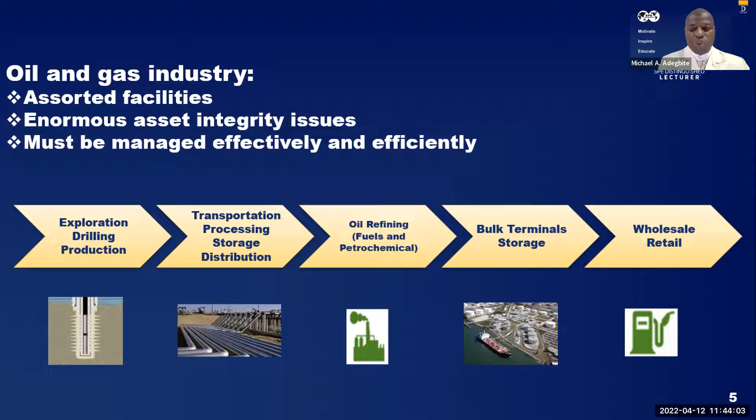Facilities are very, very key. A lot of facilities are being used, very assorted materials, from concrete to metals to plastics to glass and other materials. So facilities are very important, and a key aspect is the metal, which would be our focus. All these assets must be managed effectively and efficiently so that production of our hydrocarbons is not only economic, but also safe and very cost effective.

So the outline of this presentation will be the occurrence. We'll take a look at the occurrence. What is preferential weld corrosion? What is it all about? Is it a big issue? What are the challenges, especially in the oil industry? How do we come about this preferential weld corrosion?

That will take us to looking at the basic chemistry, or basic electrochemistry, or basic corrosion that most of us are familiar with, especially once you're science. And even those that are arts or non-science oriented, corrosion is a natural phenomenon. We'll be seeing this as we go on, and we'll be considering whether there's something beneficial at all from corrosion too.

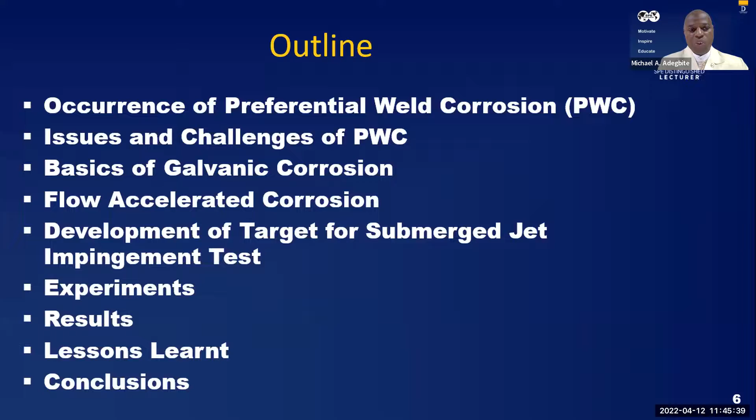And then we'll be looking at corrosion associated with flow. Anytime we have movement of a continuum, is there any corrosion that could be associated, and what are the likely issues and challenges. Then the development of submerged jet impingement, issues around that, how this target is developed and then deployed and assessed. We look at some lessons learned, and then run with some conclusions so as to implement in managing our facilities better.

Well, corrosion, again, is a natural phenomenon, and simply put, is a reaction or interaction between a material and its environment. Material now, it could be textile, it could be glass, it could be concrete, it could be metal, it could be plastic, composites, and other forms of materials. So when we have an interaction, basically electrochemical reaction, that's what we refer to as corrosion.

In this corrosion process, what simply happens is that a material will want to go back to its natural form. Simply put again, dust thou art, and dust shall thou return. And what are the possible consequences of this natural phenomenon? Material properties are degraded, especially desirable properties, could lead to premature failure, excessive maintenance, repair, and replacement, and long-term production loss, especially when it is not well managed.

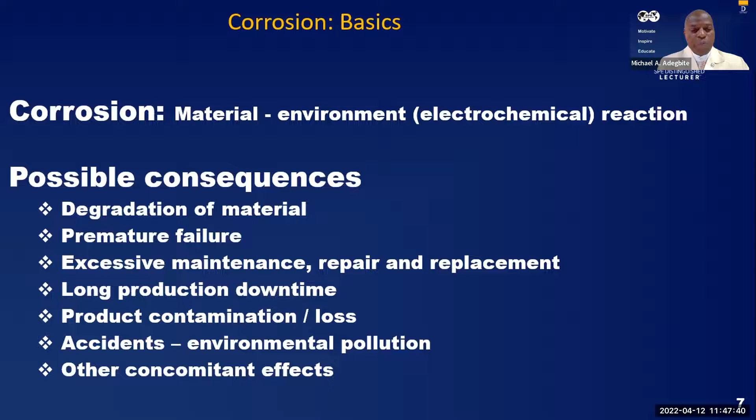There could be product contamination. We can have ingress of the environment into our product, and that contaminates the container or our product. We can also have product loss, and accidents could result from this. Product loss, again, could result in environmental pollution, both soil, water, and air, and other concomitant effects, such as secondary effects like fire and loss of life. And of course, the whole infrastructure being lost, and that will impact on production and all the production economies.

It's not all negative about corrosion. There are some good things about corrosion, and three basic major things that are very positive that we take advantage of: electrolysis. In everyday language, we're talking of coating of a metal with another metal. We take advantage of corrosion to do this, and with that, we can protect a material that can easily interact electrochemically with environment. Some products, even domestic products, roofing sheets - we talk of zinc-coated or anodized aluminum roofing sheets. This, again, takes advantage of electrolysis.

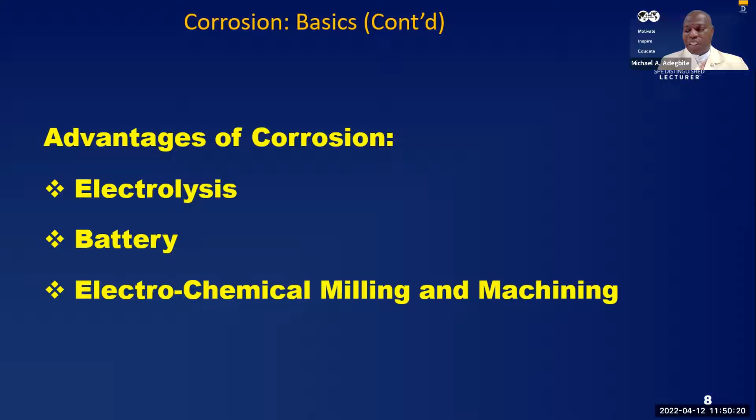Also, in terms of technology, machining - we are familiar with mechanical machining that involves mechanical removal of material from the surface in order to shape a metal. We cannot shape high precision components using the conventional, or even the high precision CNC machines, so we lean on electrochemical machining and milling equipment in order to machine systems with high precision, with tolerance limits very, very low. So we take advantage of the corrosion phenomenon to produce this.

Anytime two metals or two pieces of metal are welded together, making use of fusion weld - that is, whenever we fuse them together, we bring them to liquid state and allow the liquid metal to mix together, and then on withdrawal of the heat source, this liquid metal being mixed together now cools down and solidifies. There are some things that attend to that process whenever we join. Minimally, we have three distinct areas whenever we weld, and they are very, very important.

We can see the region of weld metal, and then an adjoining region referred to as the heat affected zone, and then the parent metal. The parent metal is far away from the excessive heat experienced during the welding operation. When it solidifies, the parent metal retains its structure, its phase phenomenon, morphology, whereas the heat affected zone has the same composition as the parent metal, but because of the intensity of heat experienced, there is crystallization and phase changes depending on the nature of the component. These phase changes compared with the parent metal are also associated with energy level differences. And of course, the high distortion associated with the weld metal, that is the metal that solidified, we can also see its highly distorted nature.

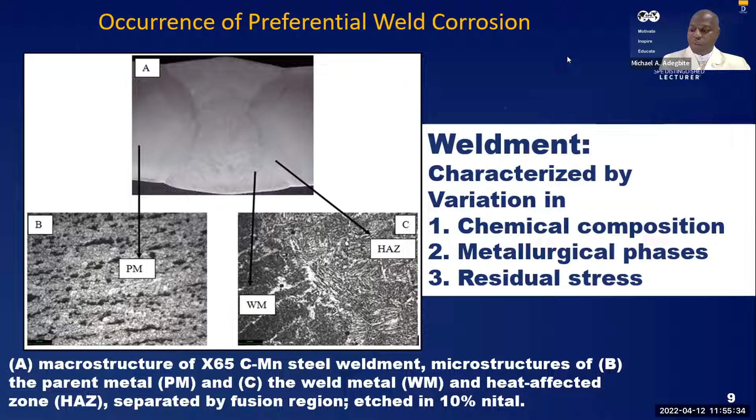So we can see here typical morphology being shown. Let's move on to the next slide.

Okay, so the next slide, we are looking at a typical post-weld corrosion incident. When we say preferential weld corrosion, we are considering selective attack of the weld metal or selective attack of the heat affected zone, or perhaps both, corroding rather than the parent metal or base metal. The base metal, when joining, is more noble and will not corrode as fast as the weld metal or the heat affected zone, or the two of them combined. That's what we refer to as preferential weld corrosion.

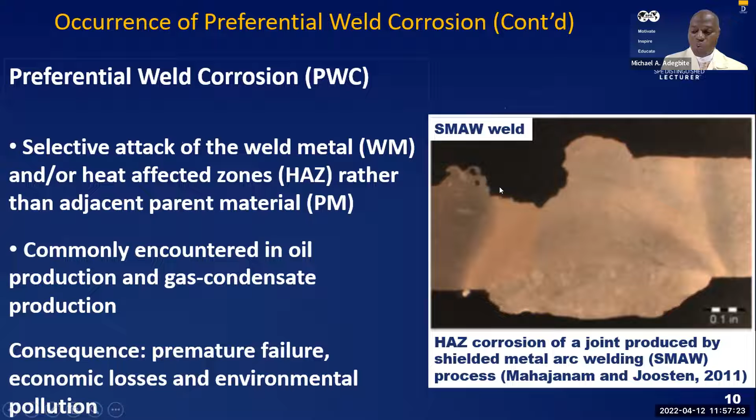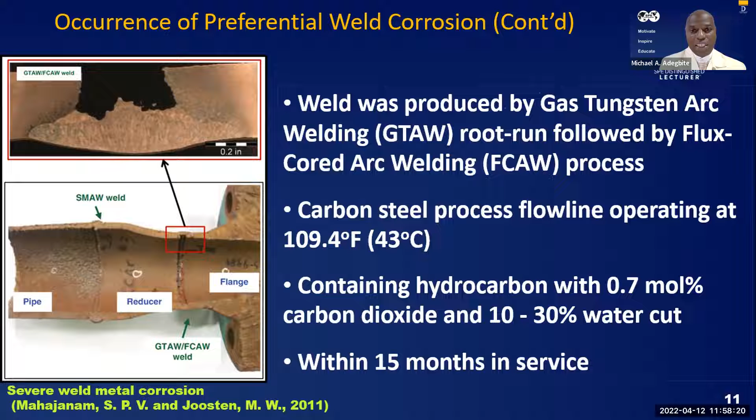It's commonly encountered in oil facilities, and the consequence is premature failure, economic losses, downtime in production, and environmental pollution. In a typical example here, we can see the weld metal selectively corroding compared with the heat affected zone and the parent metal. This happened within 15 months of being in service, leading to a failure around the reducer and then a shutdown. So a facility expected to serve for 20, 25, 30 years failing in less than 2 years is not acceptable. What could be responsible? Can we mitigate it? Can we reduce it? Can we avoid it? Perhaps much more important, can we predict it?

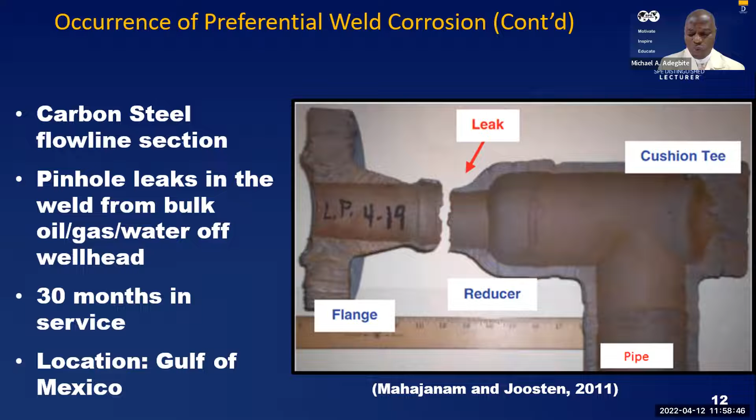Another typical example is a carbon steel flow line section having pinhole leaks. This happened 30 months in service, that's 2.5 years, in the Gulf of Mexico. And this is typical of what happens around the globe. So we need to roll up sleeves and be able to predict, to see this, and then be able to mitigate if we cannot prevent.

So what are the major factors that can influence preferential weld corrosion? Electrochemical characteristics of the weldment, that's the vicinity. What is the electrochemical nature of the vicinity of the weld? We can see that typically composition, phases, and energy associated with each region varies.

So there is variation in energy associated with each region across our weld, and that's very important. We need to be mindful of the fluid or environment, the flow pattern, especially in pipelines, be it gas or liquid. Even some may be combined with solid particles, where we can also have erosion. So all this, we have to roll up our sleeves and take a closer look.

How about inhibitors? Yes, before now, inhibitors were being deployed, but it's also noticed that they are ineffective in some instances, especially where we have flow. Another typical measure being taken in managing corrosion is corrosion allowance, which typically makes room for corrosion over a period of time. Unfortunately, as we have seen in this particular case, this is localized corrosion. General corrosion is what corrosion allowance is concerned about. Whenever we make use of corrosion allowance, the assumption is that the corrosion prevailing is general or uniform. Unfortunately, preferential corrosion is not uniform.

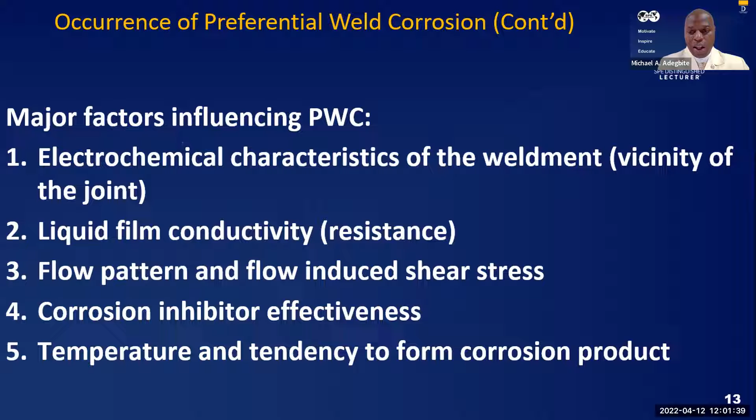Temperature of our system is also very important, and that of the corrosion product too. So these again are typical examples.

And what are some of the challenges? Again, the mechanism is a challenge. How does preferential weld corrosion occur? We need to know the location of attack. Can we determine which location, whether it's the weld metal or the heat affected zone, that will be attacked? Or can we predict, or perhaps even prefer, that it should be the parent metal? How about the efficiency of the chemical inhibitors being deployed? It's common knowledge now that inhibitors are inconsistent and not effective in some instances, especially where there is flow.

And what are some of the susceptible conditions that could lead to this challenge? How exactly can we evaluate, in a flowing or dynamic system, the shear stress on the wall of our containment, or the wall of our pipe, or storage tank? How can we assess the shear stress so that we can know the rate, or the conditions, that could lead to removal of protective layers? Then we'll be able to mitigate this preferential weld corrosion.

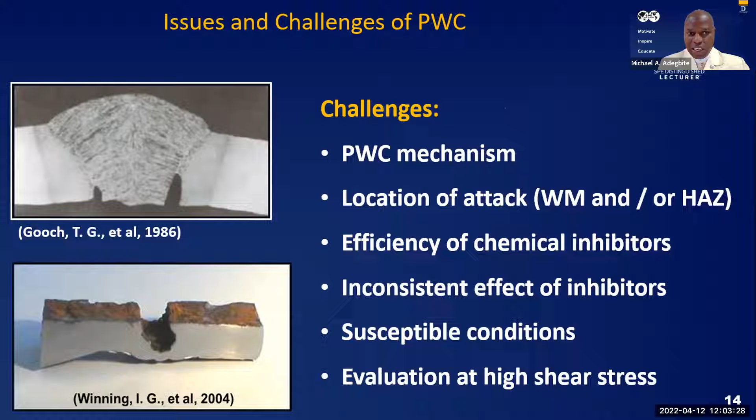It's a big challenge, but there's no challenge without a solution. And that essentially is what this discourse is all about.

It's common knowledge that whenever we have two different metals, we have what is referred to as galvanic corrosion. When two different metals are joined together, present in the same electrolyte, in the same system, and electrically connected, that's the condition for galvanic corrosion to occur. And exactly what do we have whenever metal is welded? Is it typical, or do we have these conditions satisfied whenever we weld? Well, we'll be able to answer as we go on.

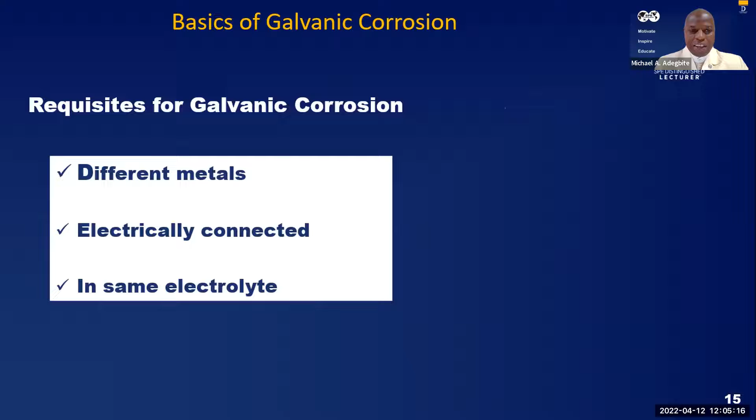Let's look at some of these conditions again. The three conditions: at least two different materials will be present in the same electrolyte, should be joined together, and also be in the same electrolyte. Of these three systems that we have here, which will you say that galvanic corrosion will occur in? Which meets the three conditions of different metals being electrically connected and in the same electrolyte?

Which of these three? I wish we can have a response, please. You may wish to unmute and share with us, choose 1, 2, or 3, please. Will it be the first, the second, or the third? Can they drop the comments in the chat box? Oh great, I've seen two people say 3.

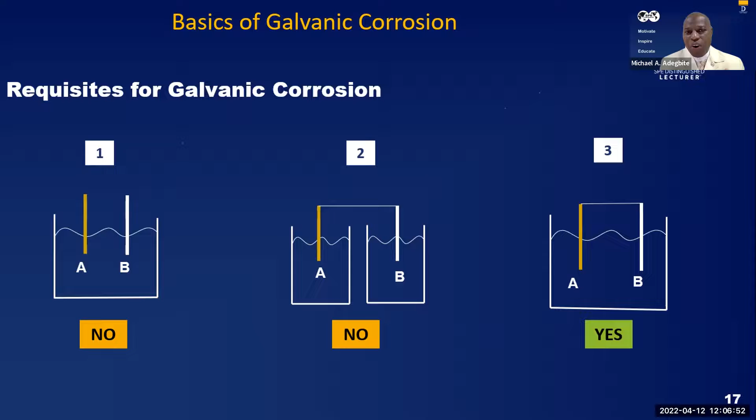3, oh fine, that's 100%. Thank you very much, in the third system, very well. The third system meets the requisites: two different metals electrically connected in the same electrolyte. And you will agree with me that that is exactly what we have whenever we weld. The metals being joined together are electrically connected in the same electrolyte, and of course being different. The three regions we have seen in a typical weld are different, and the energy they possess also differs. That difference is enough to trigger what we refer to as corrosion, because there will always be flow of thermal energy from the region of high temperature to the region of low temperature.

The same thing in a conducive environment, there will be a flow of energy from one region to another. And that's essentially what happens when corrosion occurs. Metals having higher potentials will tend to now assume a lower potential, that's losing some of the energy and assuming a more comfortable low energy state. That's essentially what happens whenever corrosion occurs.

So a more active metal, that's the anode, reaches higher potential and corrodes faster. And the more noble one is the cathode, and corrodes slower or at a lesser rate, is being protected, galvanically protected by the anode. So the cathode enjoys a measure of protection, and that is what happens when we have preferential weld corrosion.

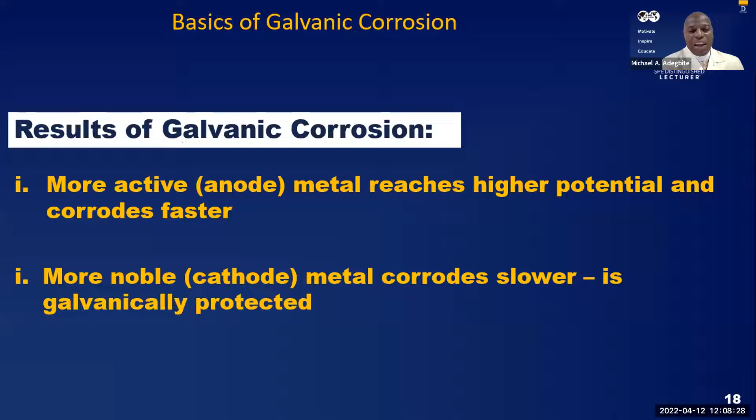So whenever we have preferential corrosion, it means that the parent metal is enjoying considerable protection while the weld metal and/or the heat affected zone goes into solution. And that's what we don't want to occur. So we want to reverse that trend. We want to deliberately make the parent metal be the anode, be the one that will have higher potential, or be the one that will go into solution.

You will agree with me again that because the cross-section area of the parent metal is more than that of the heat affected zone and the weld metal, then it's better for the parent metal to give more, because it will feel the pinch, the pain, so to say, lesser compared with the heat affected zone or the weld metal.

So in a flowing system, there are also some considerations. Whenever we have flow, there are consequences, and these are some of the things we'll be looking at. So there are some methods before now that have been deployed: the recirculating flow loops, the rotating cylinder, rotating cage, and the submerged jet impingement.

I just need to step forward a little because of our time.

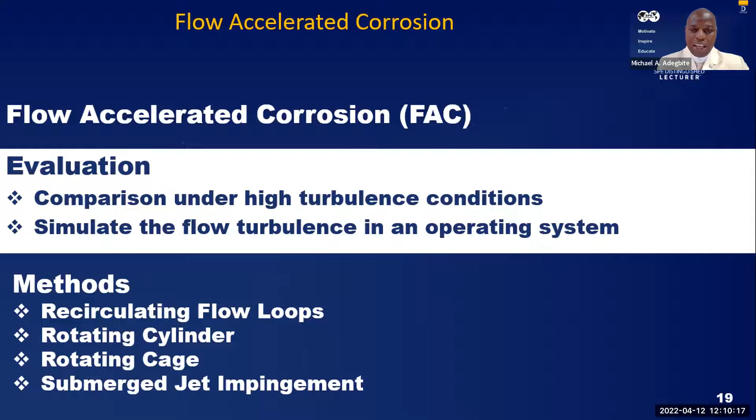So that's essentially what we'll be looking at. We want to use this to simulate the turbulence or the flow pattern in a typical pipeline. And the conventional methods, unfortunately, fall short of what the real typical field situation is like. The one very close to it is the submerged jet impingement, and that is what is being employed in this particular project.

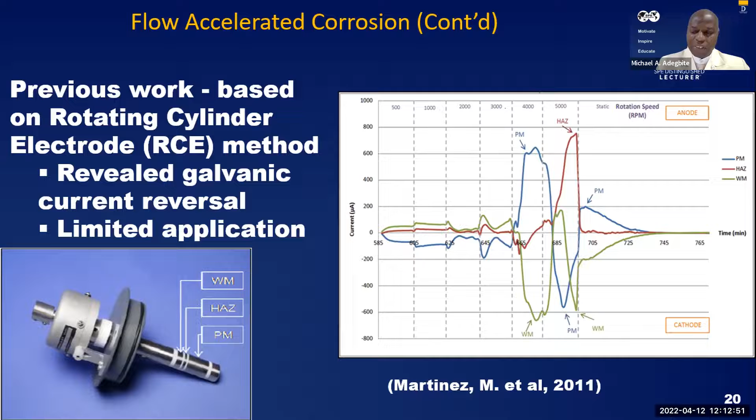So in order to really simulate field conditions, wherein we have a shear stress in excess of about 200 newtons per mm squared, what we have typically is less than about 70. That's what the previous tests have indicated. And then we need to get closer to what the flow conditions are like.

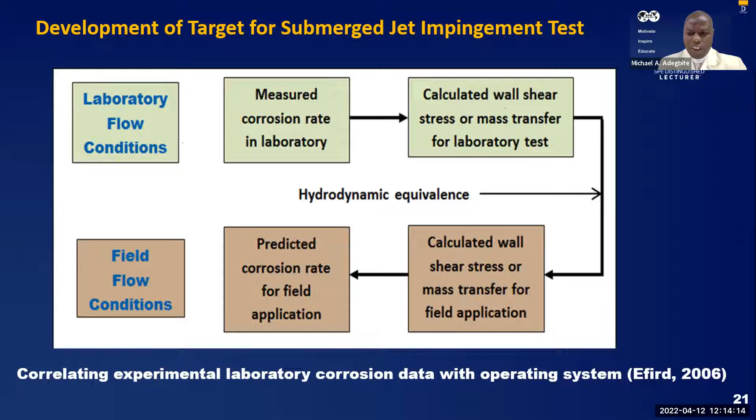And modeling is conventional knowledge, especially to colleagues who are mechanically inclined: modeling typical field situations in the laboratory, and then using an equivalent hydrodynamic factor to evaluate what could be a typical flow condition or shear stress in the field. This data is used conventionally, and the same is exploited to study typical flow regimes in the field simulated in the lab.

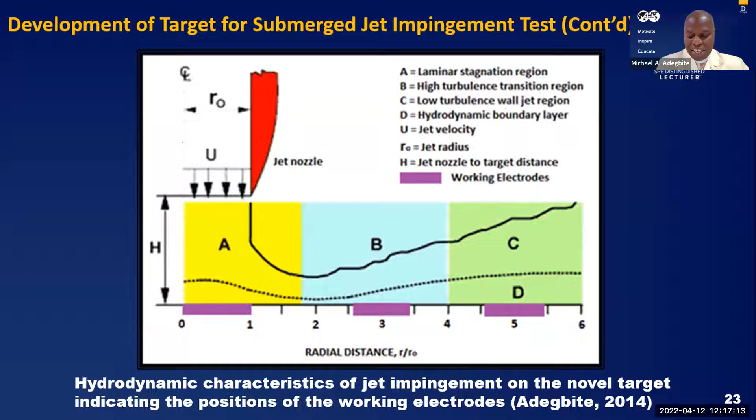And that shows that when we have flow, there are some regions associated with high turbulence and some regions, especially at the elbows, that will be stagnant. And then we also have regions with low shear stress. And that's typical, and this is used in this particular study. So the nozzle being put together, we have the nozzle, the jet, and then we have the targets being mounted in radial distances. We have the laminar stagnant region, the high turbulent transition region, and then the low turbulent region. These are characteristics of the hydrodynamic system under a flow regime.

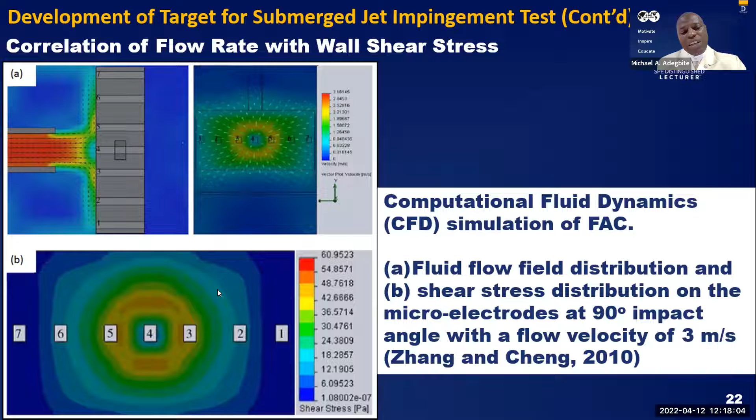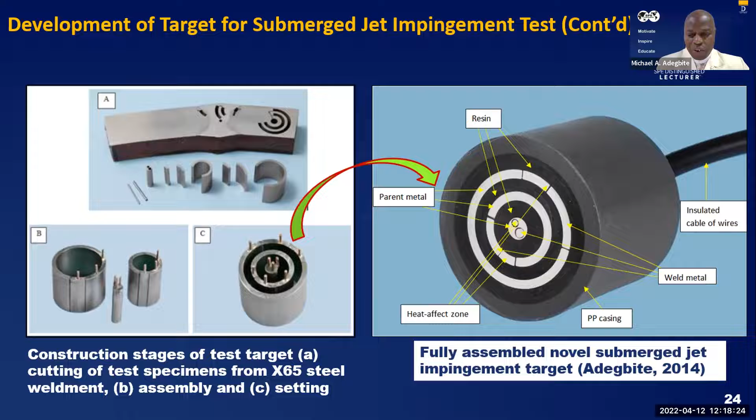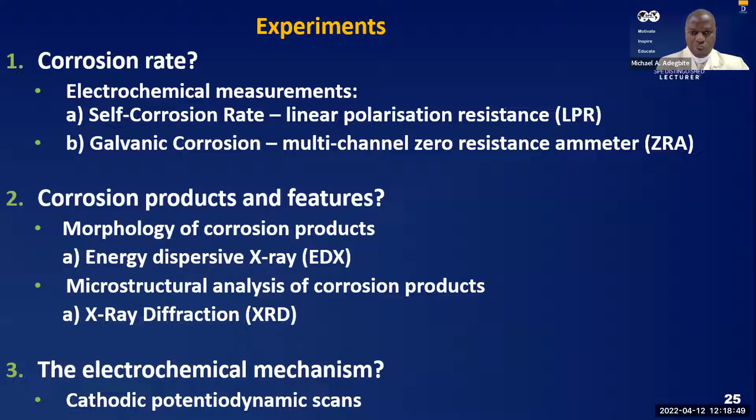The test looks at the corrosion rates, self-corrosion, galvanic, and then the corrosion product features, and what exactly could be the controlling factor. That's the third test, the scanning that was done. Let me quickly move faster now because of time.

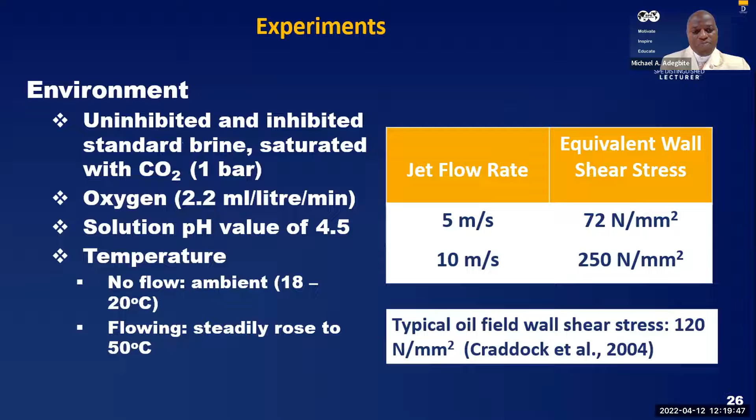So tests were conducted in a stagnant system, and in a flowing system with 5 meters per second, and that 5 meters per second is typical of a wall shear stress of about 72 newtons per mm squared. And a higher flow rate is associated with 250 newtons per mm squared. Whereas in a typical oil field condition, we have a wall shear stress of about 120. So this particular method affords us to even go beyond the typical field situation.

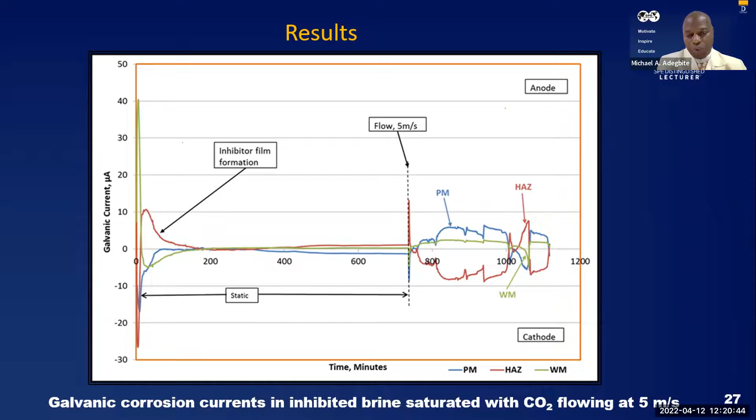So in the test being conducted, we can also see the reversal of the galvanic current here. It also establishes that the inhibitor is not consistent. This is with a typical chemical inhibitor, and we can see the current reversal. The current reversal shows that there is a buildup of a protective layer and then a breaking of the same. And at the time we have the breaking of the protective layer, the corrosion rate spikes. And of course, it shows that the inhibitor is not as reliable as we are taught it will be.

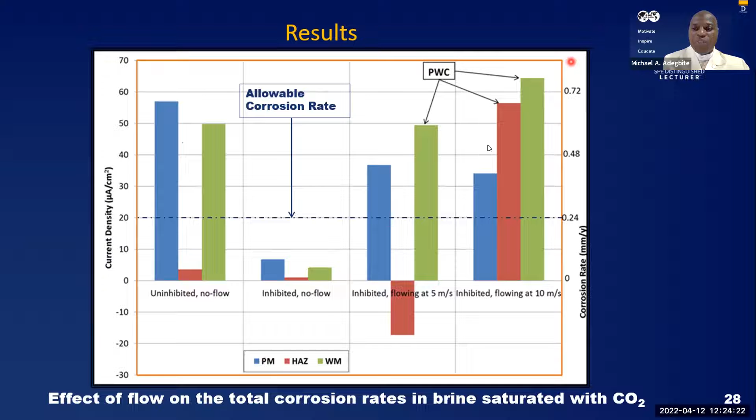In flow condition, we can see the weld metal is higher when inhibited, and when we run flowing at a higher rate, that's 10 meters per second, higher than a typical field situation, we can see the pronounced preferential weld corrosion. That is, the rate at which the weld metal and the heat affected zone corrode is higher than that of the parent metal.

And that's essentially what we have in a flowing condition. So the same result being displayed, and we can see in a flowing condition there is a challenge of preferential weld corrosion. Anytime there is flow, preferential weld corrosion can occur, and it is usually taken for granted that it cannot occur, and that's why we have this challenge. We can now see that anytime there is flow, we can have this challenge.

Well, another typical situation is when we have an aerated system. Let me just make use of the pointer again, please. In a situation wherein we have aeration, that is air ingress into our system. In a typical practical field situation, perhaps the service fluid is poorly treated, or we have air ingress into our facility, leakage of pumps, leakage of the fitting systems. Then we have air, especially oxygen, in our system.

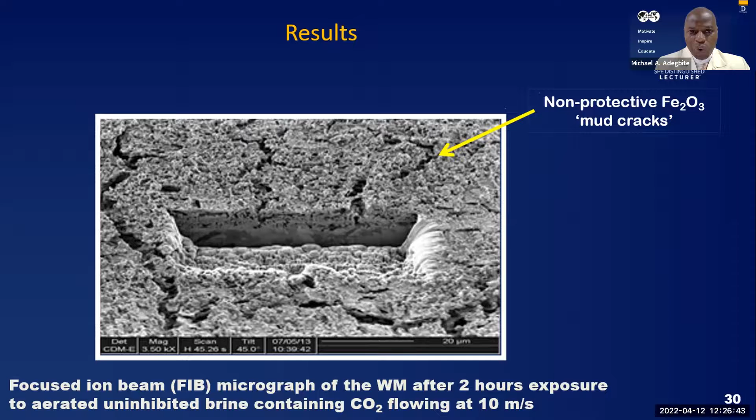Looking at the morphology, we see mud cracks: the corrosion product on the surface does not offer protection to the underneath layer. Because it does not offer protection to the underneath layer, corrosion goes on anytime there is flow, regardless of the corrosion product on the surface. The underneath layer is not protected. This is what we have when the air is admitted.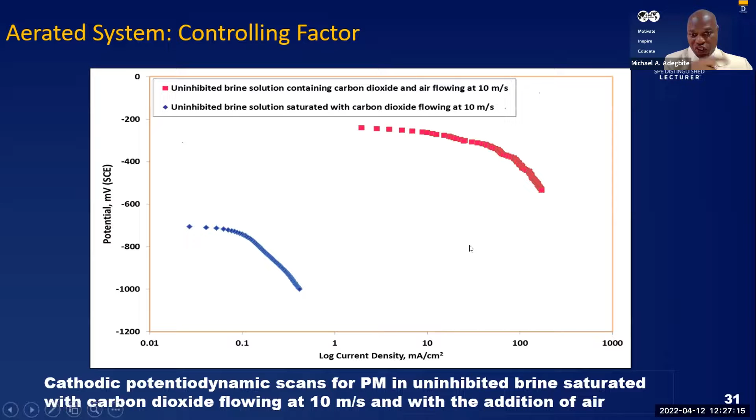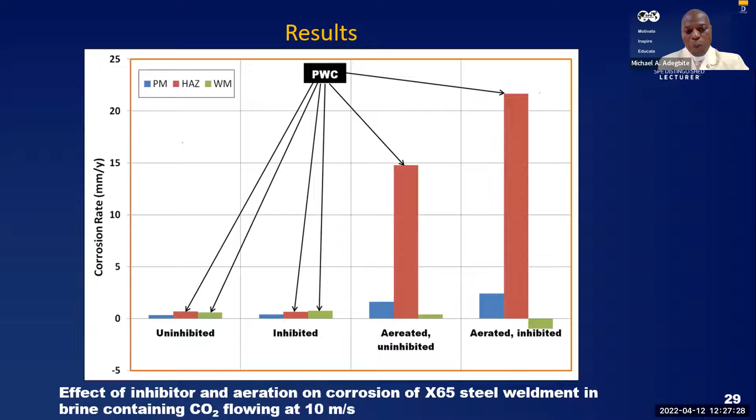That's red, and without air is the blue. This is a log current density, so we can see an order of 3. The corrosion rate is increased by three orders of magnitude, and that's a phenomenon. It also corroborates the results we've seen in this particular graph, that is, the spike in the corrosion rate compared with when there is no air in the system.

What can we do? Lessons learned. Now that we know, in the design stage we should not take things for granted, because we have learned our lessons. The entire value chain is susceptible to preferential weld corrosion. And then what can we do? As a predictive tool, it's not good enough selecting the most suitable material.

Our concern will be the properties of the welded joint, across the joint, because that is the concern now. We are not just using the material as it's produced, but we will be joining. That area of the joint is just like a chain: the weakest link should be our main focus. So we need to focus on the materials, the fabrication, installation and commissioning, operations, production parameters, especially if we want to increase production rate, which means increasing the rate of flow.

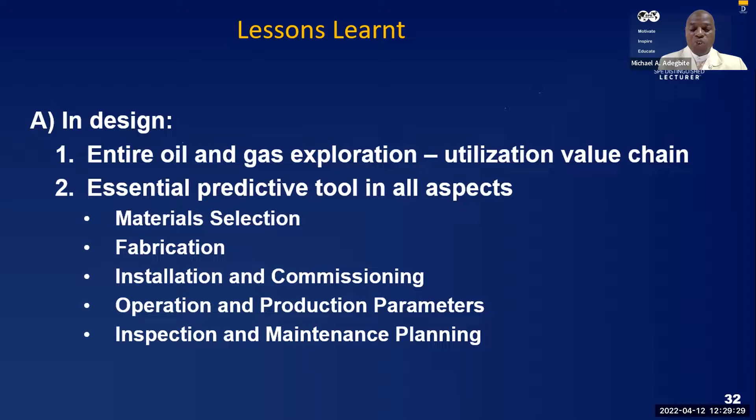The flow regime means that whatever corrosion product could be offering partial protection will be easily removed, or any product being formed will be removed, and then a fresh surface is exposed and the corrosion rate spikes. Also of importance is admittance of air into the system through poorly treated service fluid, and ingress through poor pump systems or any valves we may be using. And of course, it also informs our inspection and maintenance planning.

In service, we then need to roll up our sleeves in choice of our inhibitors. So there is need to conduct case-by-case inhibitor characterization for our system, and not only for the system, but also for the flow regime that we have in mind. Very, very critical in order to justify overall production. So we need to choose our flow rate very well, not just fire down, and we need to be more careful now because we have the big picture in mind.

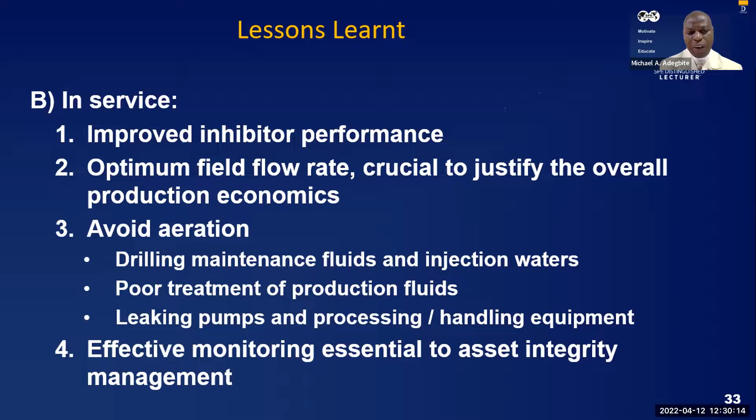Aeration, I've said that, drilling fluid, poor treatment of system, and of course, leaking pumps and equipment. And of course, effective monitoring, very, very important. In conclusion, the efficiency of our inhibitor is high when there is no flow, especially in storage systems. But then in storage systems, how you get the fluid into your storage system matters too. But generally in a stagnant situation, the inhibitor is reasonably efficient.

But when there is flow, as a result of the shear stress exerted on the wall, that efficiency is lost. So an aerated system will easily result in preferential weld corrosion, especially when we have oxygen, and we have seen that with oxygen, the corrosion process is under oxygen mass transport control. That's the scanning that was done and the graph being demonstrated. Now we can better manage corrosion, and it's also been demonstrated that this is a reliable tool to mitigate and to predict preferential weld corrosion. So it is now possible.